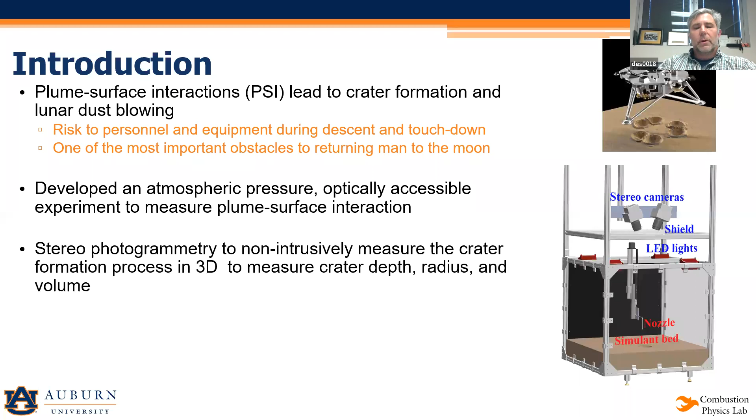We are now working on a subatmospheric pressure facility to be able to do these measurements without the ambient atmosphere around. So as I mentioned, one of the important parts of this is the use of stereo photogrammetry, basically the use of two or multiple cameras to be able to reconstruct a three-dimensional scene and do that at high speeds, so fast enough that we can actually resolve the formation of the crater.

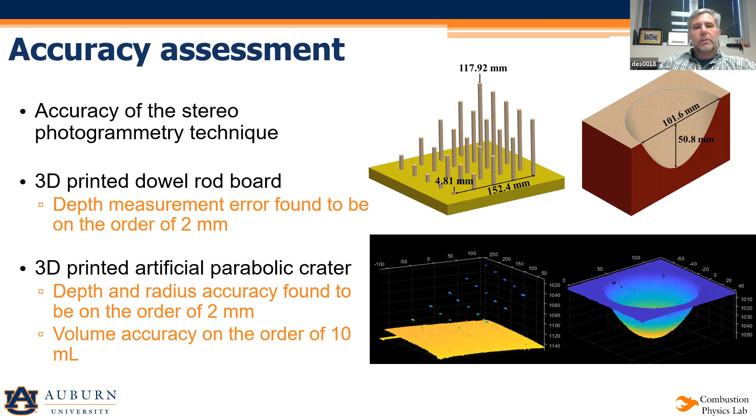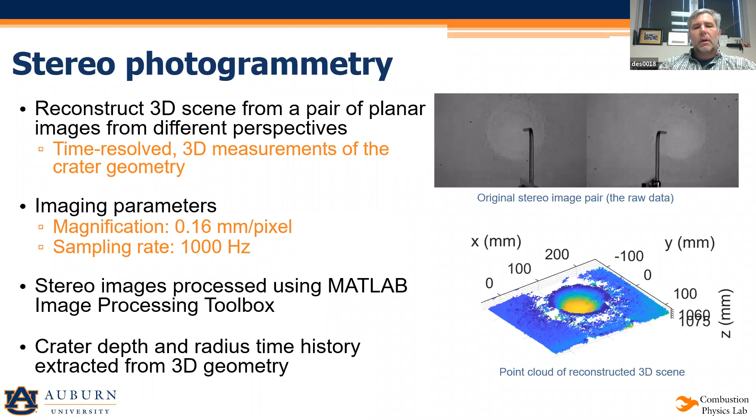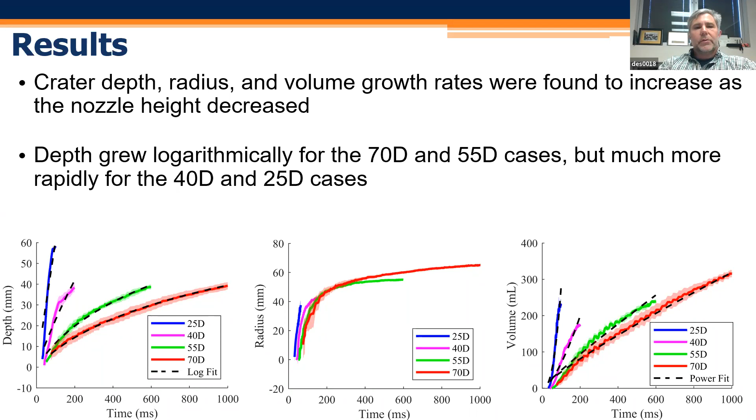And from that, we can then extract the depth and radius and even volume histories. You can see some plots of those things here. These are for different nozzle firing elevations above the surface. The first one is the crater depth evolution, the next one is radius, and the last one is taking the 3D point cloud and generating the crater volume as a function of time. So that's a project that we're very actively involved in.

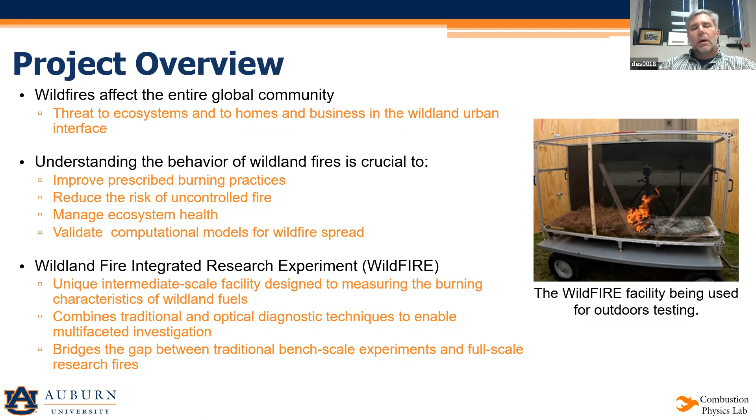We're also, a little out of the ordinary, working on some experimental characterizations of wildland fire. There's a significant threat to homes and businesses due to wildfires, especially now when we build homes right next to wildland areas. And there are lots of concerns and needs here, but the bottom line is that experimental data is needed both for use in models and to validate models in general.

And so what we're trying to do is use a combination of both traditional and modern optical diagnostics to measure the propagation of these wildfires in a controlled environment. For example, we use load cells to measure the rate of fuel mass loss, whether there's any residual material left over, thermocouples to measure temperatures, and a gas analyzer to measure emissions from the flames themselves.

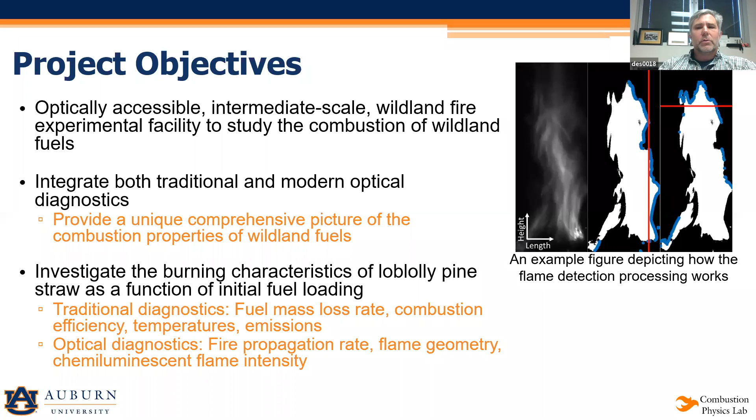In addition to that, we can take high speed, or in this case we frequently use slower speed diagnostics to measure how rapidly the flame propagates across the surface, the geometry of the flame itself, and even the chemiluminescent intensity, which is a measure of the heat release rate. I'm going to skip over this slide in the interest of time.

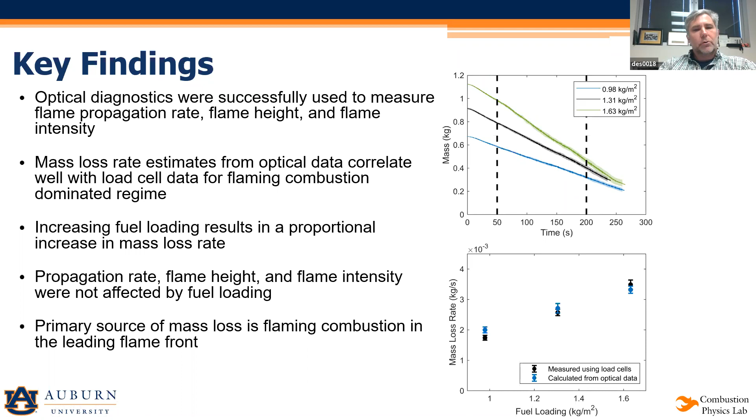But the point is we can very accurately get mass loss as a function of time for different fuel loadings. At the bottom, you see a comparison of the mass loss rate for different fuel loadings, both measured using load cells and calculated from the optical diagnostic data. And one of the things that we found, at least in the cases we tested, was that primarily the mass loss is due to flaming combustion rather than smoldering combustion. So that's something we're looking into as well.

So I'm going to transition at this point and talk some about the general area of combustion instabilities. We have developed reduced order modeling tools for predicting combustion instabilities, when a combustor will be unstable and the frequency that it will be unstable at. And one of the big pieces missing in those models is understanding the acoustic response of engine components.

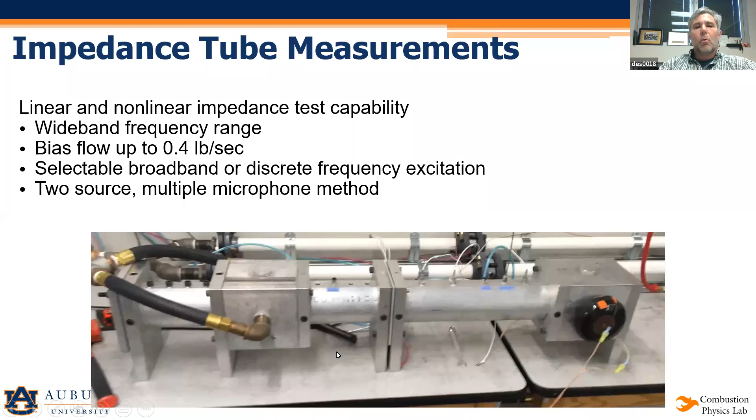And so we have a method for measuring the acoustic impedance of insertion elements, as we call them. For example, a fuel air mixer, what we call a swirler in a gas turbine engine, and we're able to measure the resistive and reactive parts of the impedance of those as a function of flow rate through those devices. Similarly, for perforated plates.

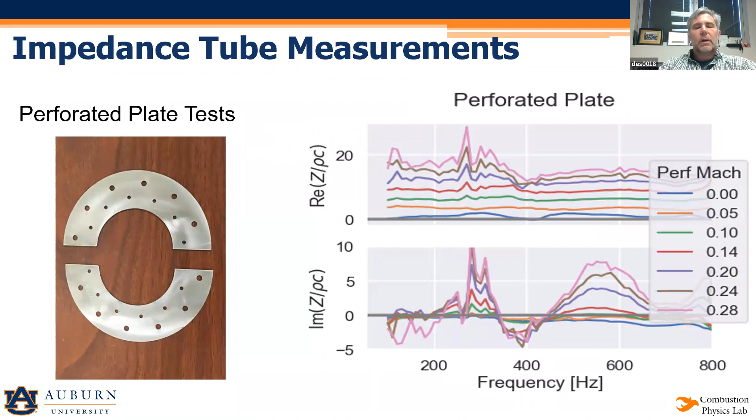And in a different series of tests, we worked on another component that is basically used both to ignite the flame and also to measure the amplitude of the instability in the engine. And I'll just point out the key issue here is that because the pressure transducers are located in standoff tubes, this device has an acoustic response.

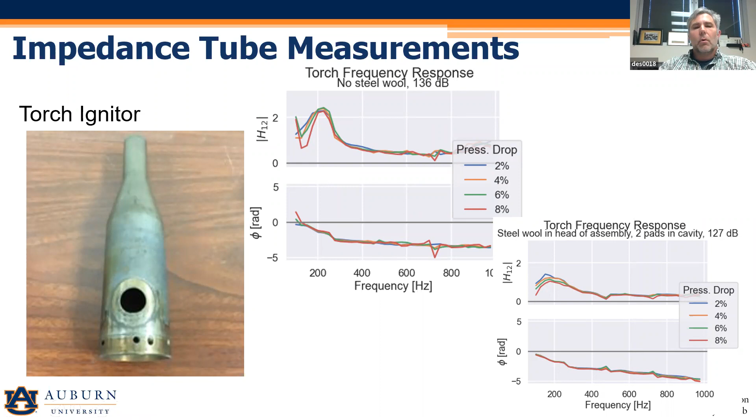And so the actual pressure measured by the pressure transducer can be, in this case, as much as twice as high as the actual pressure. And then at other frequencies, you're actually measuring much lower than the actual acoustic pressure. And so understanding the acoustic response of this device is critical to properly diagnosing or measuring the acoustic pressure in the engine during instabilities.

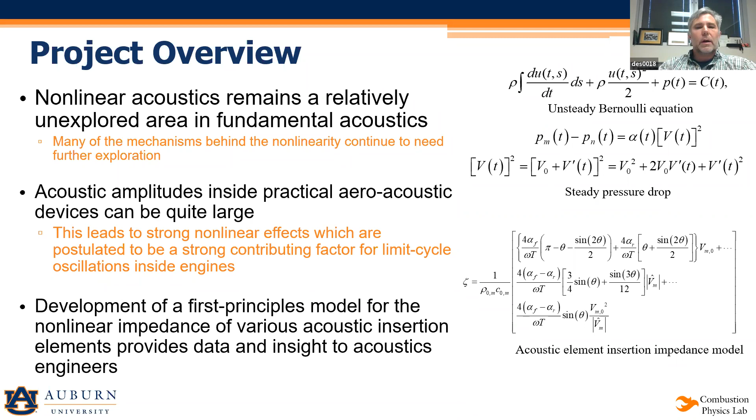We also do a good bit of reduced order modeling. We've developed a model. It looks complicated, but once you plug it into MATLAB, it's not that difficult to use, that is able to predict the nonlinear acoustic response of certain engine components, things like area contractions, perforated plates, and orifices. And I'll just skip to this slide here.

At the bottom left, you see some data for an area contraction, and the model is laid over top of those measurements. And you see we're actually able to do a really good job both in the purely linear acoustic regime and as well at very low flow rates where acoustic nonlinearities dominate the acoustic response of the components. And we're actually using these models and comparing them with data for orifices, as well as the swirler and perforated plate that we saw earlier.

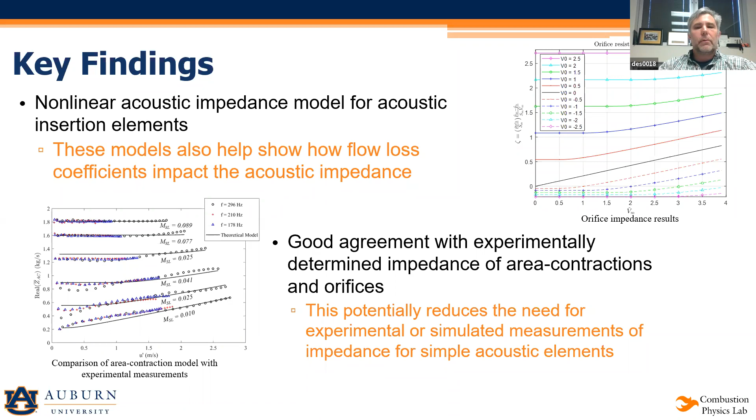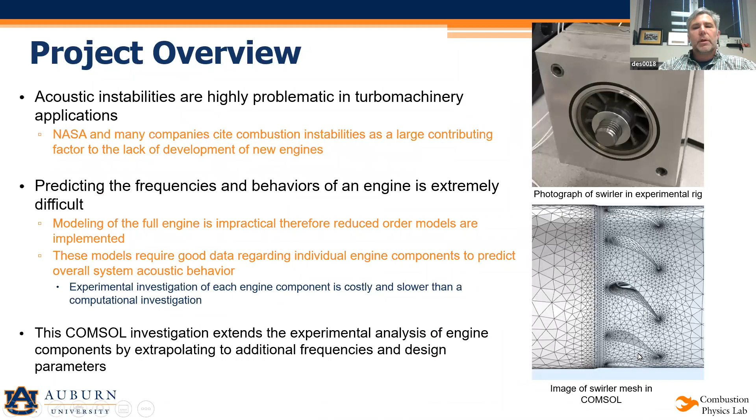So basically what this boils down to is you can identify one parameter like a discharge coefficient or a loss coefficient and apply it in that model, and it'll give you the acoustic response of the component that you're interested in. One other area that we're doing some modeling is in using COMSOL to try to simulate the acoustic response of these components.

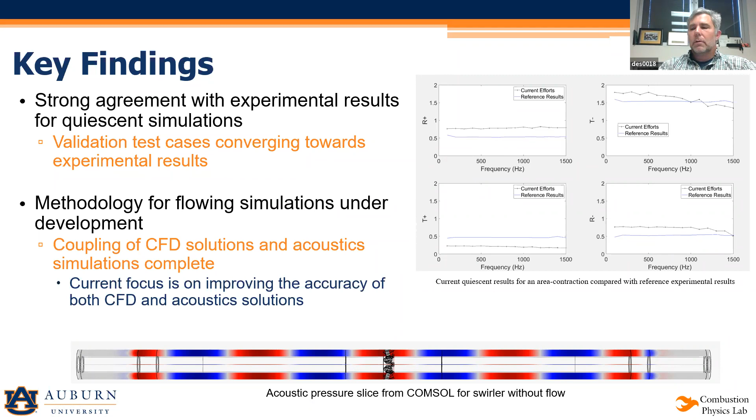And so again, just to show you the results here, after significant work on developing the methodology, you can see at the right, we have good agreement between what we call reference results or well-established results and the results that we obtain from COMSOL. And the advantage of this clearly is we can explore regimes with COMSOL that we can't do experimentally, and even explore components that we may not be able to work on experimentally.

So one last area, and I'll wrap this up. This is an area that new graduate students have been working with me on, and that is looking into additive manufacturing for rocket engines, both liquid rocket and rotating detonation engines. And in particular, we're looking at how to develop and evaluate quickly these high performance injectors that are designed to be resistive to pressure oscillations in the engine, while at the same time giving desirable combustion and spray pattern. So we intend here to be using some stereographic and plenoptic imaging techniques to look at the spray patterns produced by these injectors.

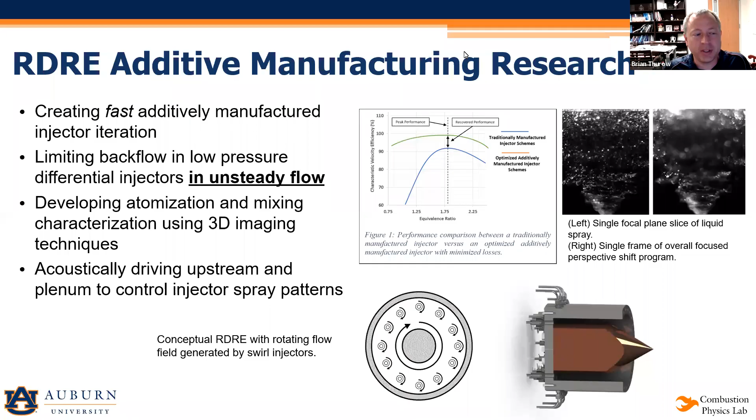So I just want to make sure you tell Roy we were sorry not to see his smiling face live on the show. I'll pass that on to him for sure. Okay. All right, thanks.